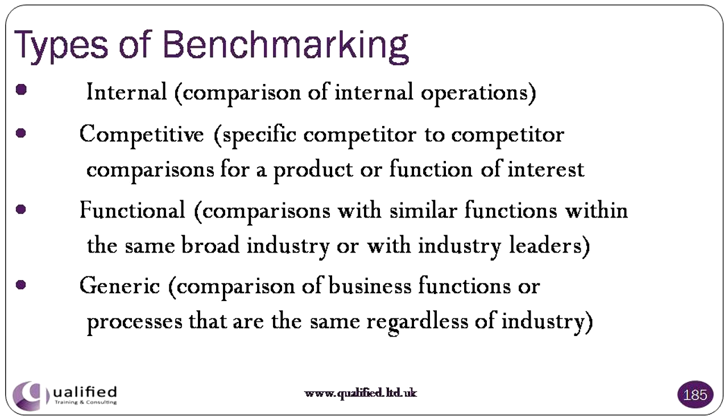Occasionally, most notably in the public sector, hybrid benchmarking may be used, which compares departmental performance in chosen areas with public and private sector performance in similar areas.

Whichever type of benchmarking is being followed, it is useful to work to an established methodology. It is an 8-step process that begins with the selection of processes for review along with an evaluation of current performance. We then look at identifying partners if the benchmarking is to be external. Otherwise, we will progress on to the 4th step, that is to say, agreement on a measurement strategy.

The next stage is then to compare standards and note any difference in performance that we may see. Critical success factors and key performance indicators may be used to help us to make the necessary comparison.

When this has been done, we can look towards modifying the relevant practices that may be seen to affect performance. Then we can repeat the comparison and see for ourselves the extent of the improvement relative to our first comparison. Following this, the exercise can be done again with the same or other partners, with other processes, until eventually all of our processes are under continual review.

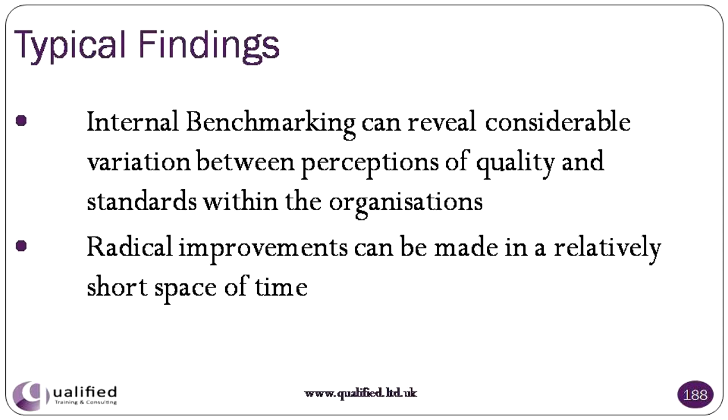Benchmarking exercises can be extremely useful, with radical improvements often being realised within a relatively short space of time. Internal benchmarking also notably can reveal considerable variation in the perceptions of quality and standards within the organisation, and this can greatly assist management in planning for quality in the future.

Back in Unit 2, we made reference to the process approach as one of the 8 principles of quality management. We mentioned flowcharting as a technique to assist us in this. A logical extension of the process approach is what we call business process re-engineering, a technique originally developed in 1993 by authors Hammer and Champy.

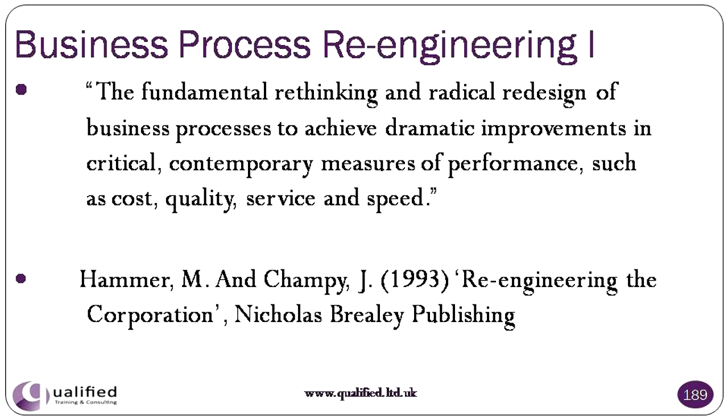It is defined as the fundamental rethinking and radical redesign of business processes to achieve dramatic improvements in critical contemporary measures of performance such as cost, quality, service and speed.

This technique is particularly useful for making things like duplication of effort, non-value adding work and bottlenecks clearly visible. With this, lots of intangible costs can be identified and removed.

A tool that is often used with BPR is value chain analysis. This is a useful concept in that it helps us to define those processes that are of a non-value adding type.

These in turn help to show us where the muda, or waste, lies in the total system.

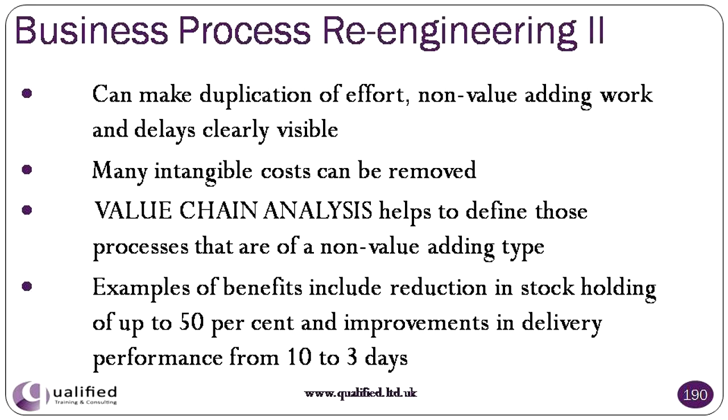BPR, or Business Process Reengineering, is a tool frequently deployed during a time of economic downturn, when organisations really have to cut down sharply on wasteful activity. Reported benefits of BPR have included reductions in stock holding of up to 50% and improvement in delivery performance, where a reduction from, say, 10 to 3 days is not uncommon.

Teams form an integral part of quality management and are vital to the improvement process. It is therefore very important to have an objective means by which to assess their performance. A useful guide for this is the Perkins and Michelin team assessment criteria, developed back in the early 1990s, which we teach in our CQI module, Using Quality to Improve Business Performance.

Teams may be of the single problem, management-promoted type, that is to say established by management to analyse and solve a specific problem or improve a selected part of the business. Or they can be continuous improvement, self-directed teams that select their own problems and are generally voluntary in nature. The first type may be referred to as a quality improvement team.

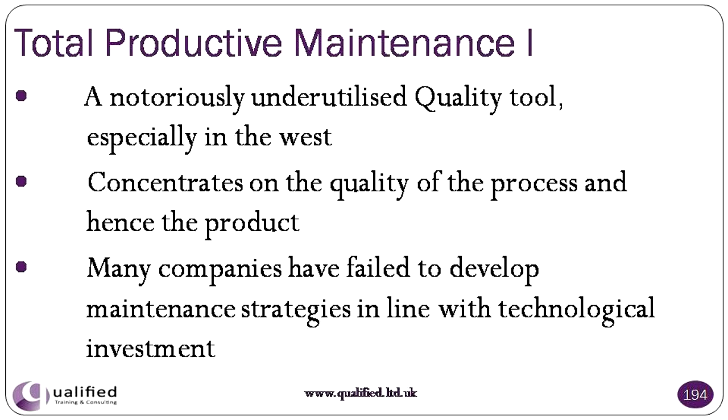Another quality-related tool that unfortunately has remained notoriously underutilised in the West is total productive maintenance. Yet it is of fundamental importance, concentrating as it does on the quality of the process and hence the product. The reality is that many companies have failed to develop a maintenance strategy in line with technological investment, and the result has been a severe deficiency for many organisations. Maintenance has become management's Cinderella, resulting in chronic losses, often unseen, that need not be there.

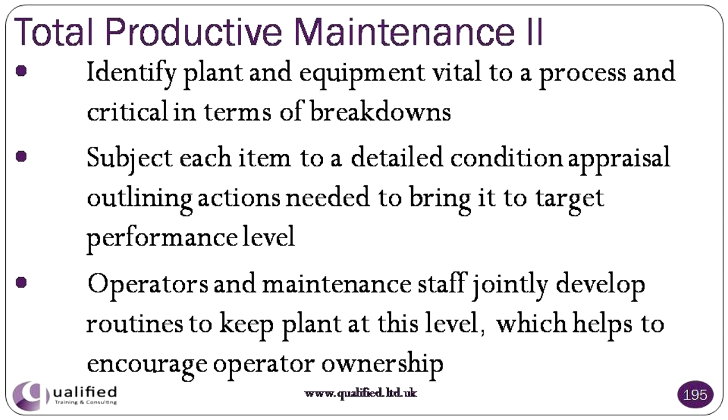In order to apply this technique effectively, it is necessary first to identify the plant or equipment that is vital to a process and critical in terms of breakdowns. Then, having done this, subject each item to a detailed condition appraisal, outlining the actions needed to bring this equipment to its target performance level. Then enable operators and maintenance staff to jointly develop routines to keep the plant performing at this level. This helps encourage operator ownership and break the mentality of 'if it ain't broke, don't fix it.'

A popular tool in recent times has also been Six Sigma, concerned with process control to high tolerances and process capability to meet these high demands. It is a logical extension of SPC, but much more demanding. Non-mathematically, sigma may be defined as a measure of how well data is clustered. A small sigma implies that data is tightly clustered and so exhibits low variation. A large sigma, by contrast, implies that data is loosely clustered and that variation is high.

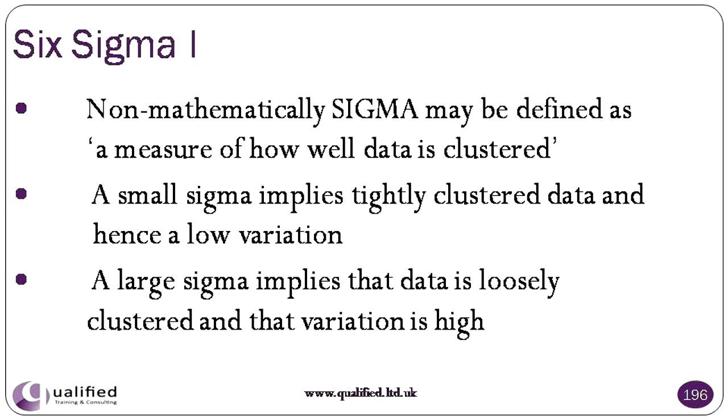With the Six Sigma technique, specification limits are set at plus or minus 6 sigma either side of the mean or target, so as to build in a design margin to the product.

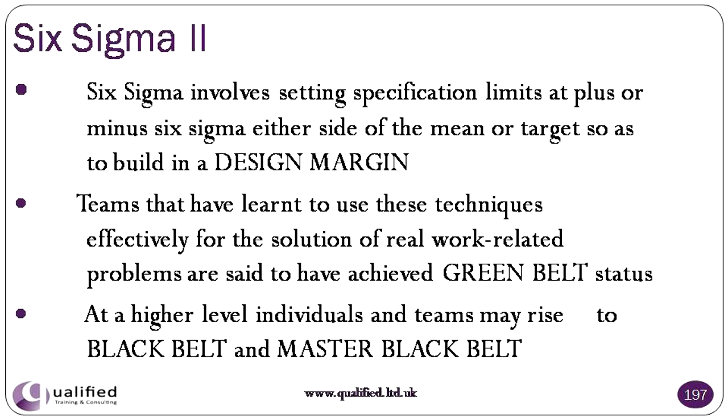Teams that have learnt to use these techniques effectively for the solution of real work-related problems are said to have achieved green belt status. At a higher level, individuals and teams may rise to black belt or beyond to the level of master black belt.

This technique is applicable where extremely high tolerances are required, or where the number of defects produced from a process needs to be reduced to below 3.7 parts per million. The method used for these types of projects is called Define, Measure, Analyse, Improve and Control, which we otherwise know as DMAIC.

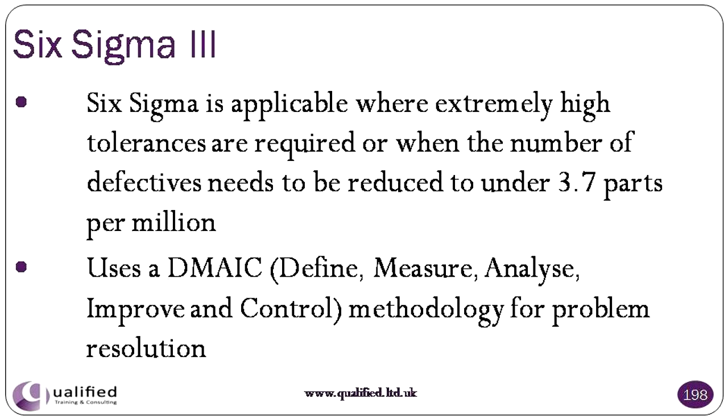Earlier in this course we referred to Dr. Walter Shewhart as the father of statistical process control, and it may be useful to recap here the nature of SPC as an analytical decision-making tool that enables visibility of when a process is working correctly.

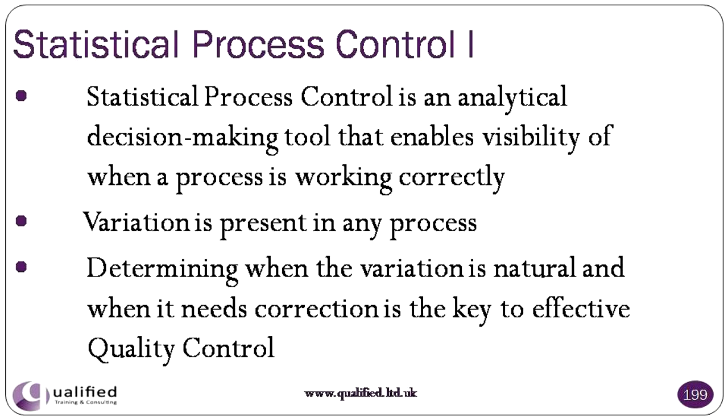We've already stated that variation is present in any process, and that determining when the variation is natural and when it needs correction is the key to effective quality control. In particular, if a process is in control, its outcomes can be accurately predicted. If it is not, then the outcomes will be inconsistent and unpredictable.

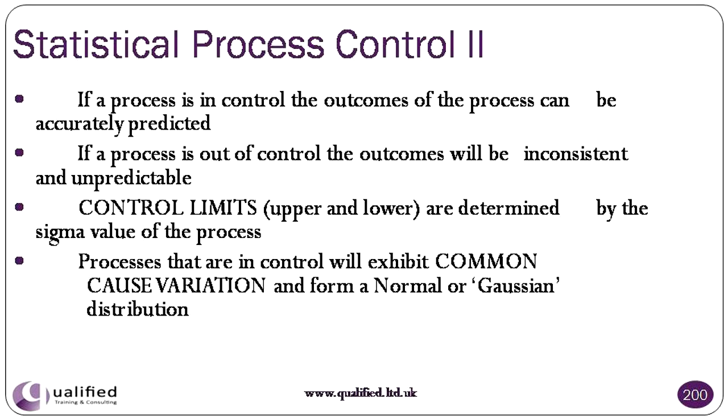The upper and lower control limits of a process will be determined by the sigma value of the process, and processes that are in control will exhibit just common cause variation, and therefore form a normal or Gaussian distribution about the mean.

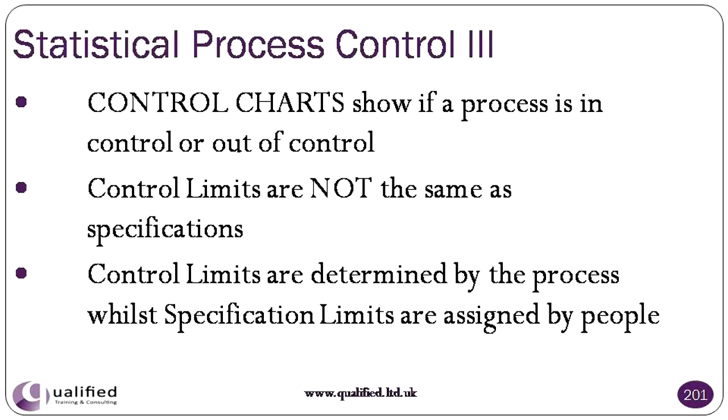Control charts will show whether a process is in control or whether it is out of control. We must note here that control limits are not the same as specifications. Control limits are determined by the process, while specification limits are assigned by people.

We'll now turn to another manufacturing tool that has risen to prominence, led by the automobile industry and Toyota in particular. The concept is what we call lean manufacturing, introduced to the West by Womack in 1990 in his famous work, The Machine That Changed the World.

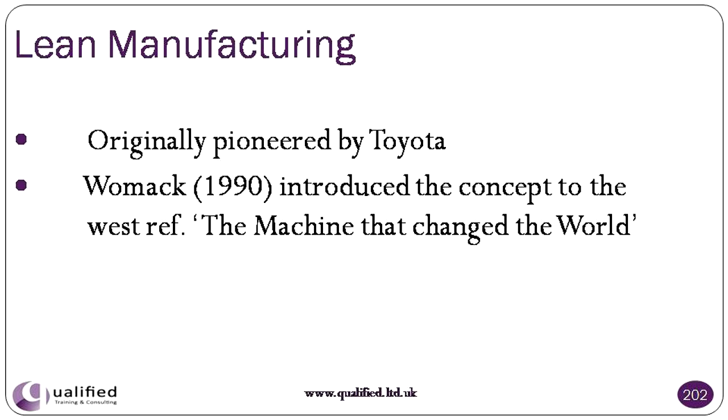With this tool, we have to specify value by product and identify what we call a value stream for each product. This identifies where the value is created, as we discussed earlier in relation to a value chain analysis.

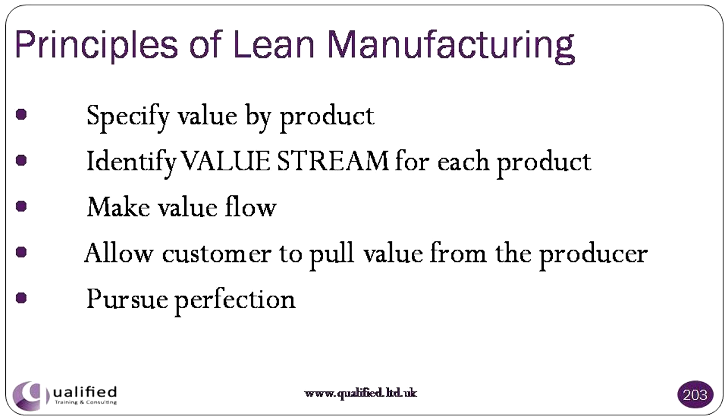Value flows along the stream, such that the customer pulls value from the producer. This is analogous to pumping water from a well. As with other quality management concepts, the pursuit of perfection is maintained through continuous improvement, adding as much value as possible and removing the non-value adding activities that create or represent the muda.

Another principle of quality management of which we need to be aware is that of quality costing. Armand V. Feigenbaum, whom we referred to earlier, first rose awareness of the cost of poor quality in the 1950s, with further refinement being made by Philip B. Crosby in the 1970s.

The cost of poor quality represents the difference between the actual cost of a product or service and what the cost would be if the process were effective in manufacturing products that met customer needs and were defect-free.

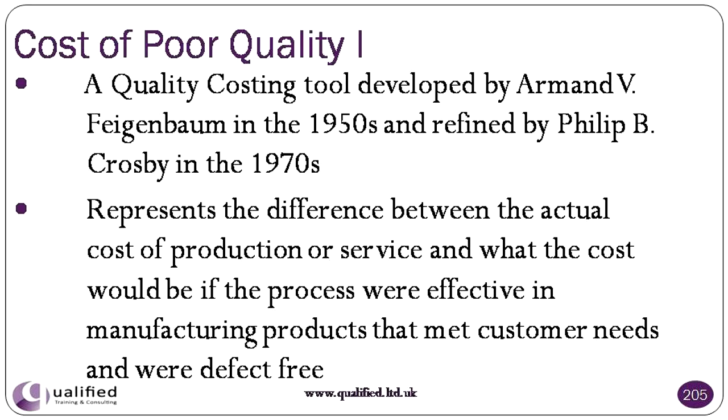The cost of poor quality is important, not least because it speaks in the language of management, that is to say, money. It is related to lean manufacturing in that it focuses on reducing appraisal costs, that is to say, the cost of inspection. As we learnt from Deming, we must cease dependence on mass inspection to achieve quality.

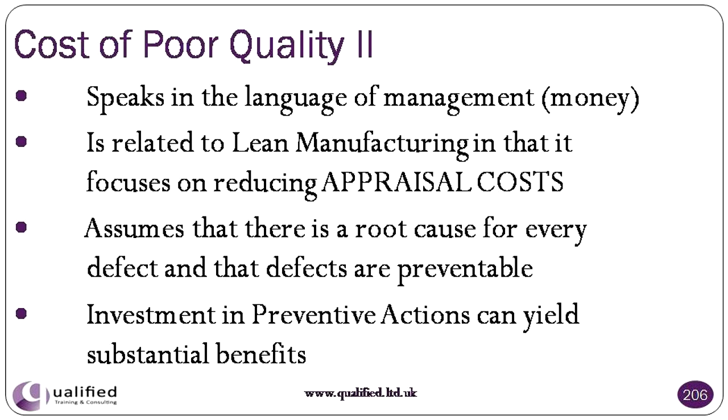The cost of poor quality assumes that there is a root cause for every defect, and that defects are in fact preventable. The objective, therefore, is to invest in preventive action to prevent the unwanted external failure costs, that is to say, costs incurred as a result of defects reaching the customer in the form of warranties and lost business, and internal failure costs such as scrap and rework.

An important tool for identifying product and service features that are critical to certain types of failure is failure mode and effect analysis. The principle behind this tool is one of identifying failures before they happen, so that we can avoid them by designing them out.

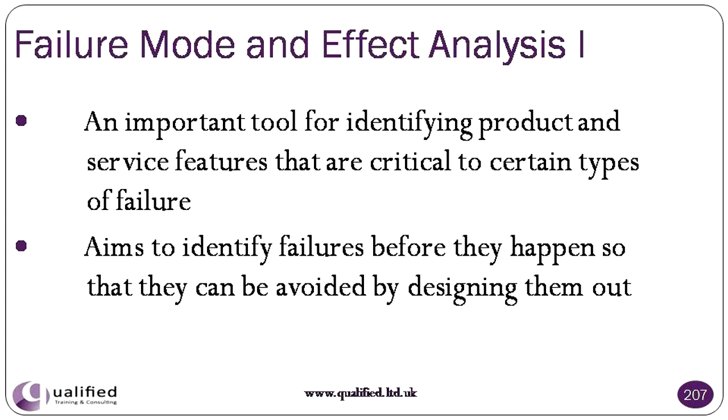Originally developed by the US military in the early 1960s, the tool seeks to ascertain the likelihood that a failure will occur, the consequence of such failure, and how likely it is that the failure will be detected before it affects the customer.

The theory assigns risk priority numbers based on the answers to these questions. Corrective actions aimed at preventing failure are applied when the risk priority numbers indicate that there is a priority.

One of the many Japanese gurus that emerged following the early visits of Deming and Juran was Kaoru Ishikawa, whose name is given to what we otherwise know as fishbone charts, so named because of their shape.

Ishikawa or fishbone charts are also referred to as cause and effect charts, by virtue of their function, which is to trace back from the effect or symptom of a problem through to the root cause that created it.

We should note here that we are moving away from merely treating symptoms to performing a full root cause analysis in order to determine the true cause of a problem.

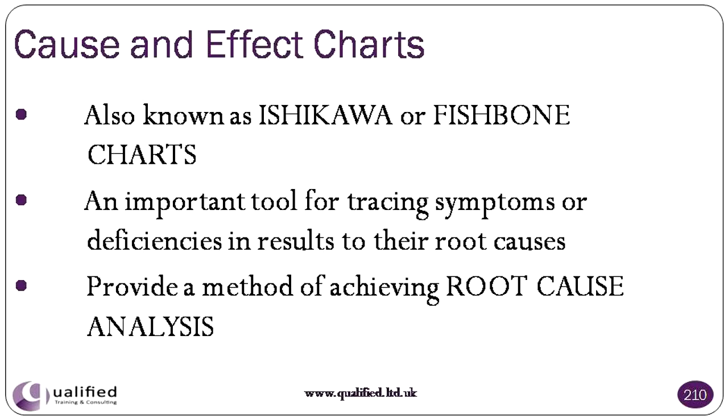Very often the true cause may not be obvious, and without tracing back to it, the potential for problems to recur or proliferate is always going to be there. This tool therefore has very wide application and ranks amongst the most important for quality practitioners to deploy.

Another of the Japanese gurus whom we should be aware of is Genichi Taguchi, who, in addition to developing his well-known loss function, contributed greatly to the science of experimental design.

In particular, he taught us how to test for robustness in the design of a product and provided methods for ensuring that quality is designed into a product as opposed to being merely inspected out.

This principle is one of the utmost importance in today's age of competitiveness, and naturally one which Qualified Limited is keen to adopt and promote in this short course series.

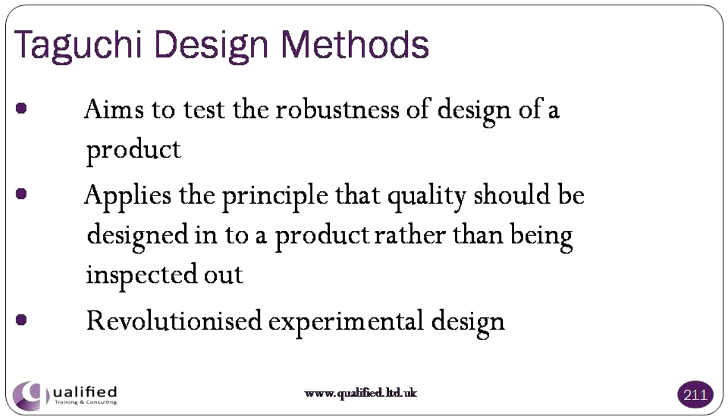Another design-based tool is Quality Function Deployment, otherwise known as QFD. This is customer-led design and related to the methods devised by Taguchi.

The principle here is to take the voice of the customer and transpose it into the design of a product, resolving any trade-offs with production.

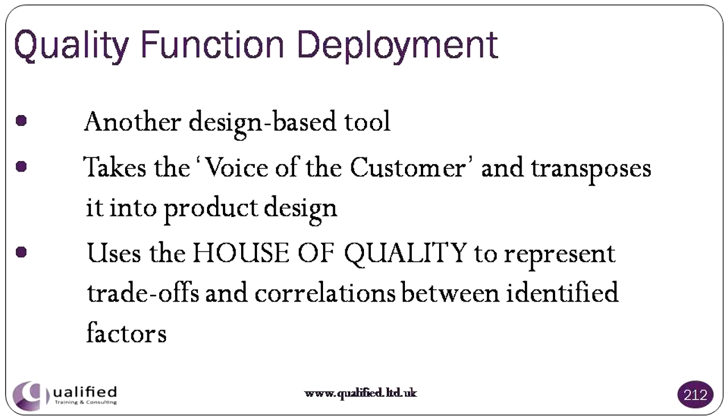The whats and the hows of QFD are represented in what we call a house of quality. That is deployed in up to four stages as the hows of one chart become the whats of the next until we reach our best available optimum.

And finally, the last tool that we need to introduce is that of knowledge management. This is increasingly being recognised as an important quality management tool. This discipline, most specifically, recognises the intellectual capital that exists within an organisation.

Knowledge has value, sometimes a very high value, and for an organisation to lose it can be very costly, although no such value may appear on a company balance sheet.

High labour turnover is a problem of particular significance as it adds, often unnecessarily, to the training budget. Of course, knowledge can be brought in as well as lost, but the guiding principle has to be not to part with hard-earned knowledge and all of its value-adding potential.

With knowledge management, a distinction is made between tacit knowledge, that is to say, the knowledge that potentially exists within the minds of individuals, and the explicit knowledge that is codified in the form of books, patents, and other documents. As Deming said, there is no substitute for knowledge.